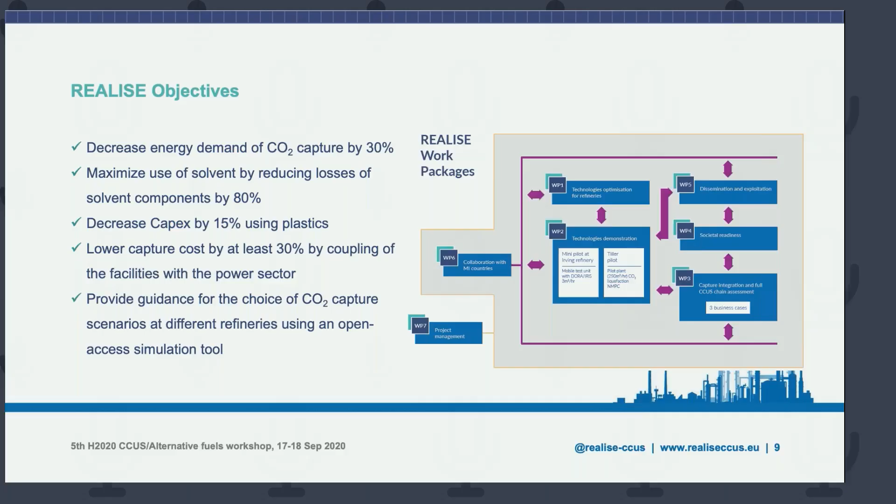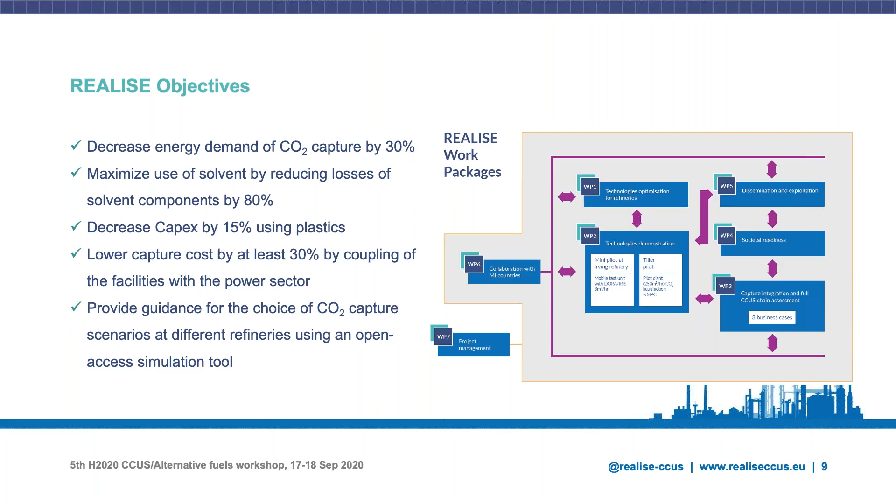Also look to decrease the capex by 15% by using plastic as a building component for CO2 capture plants, and also lowering the capture cost by 30% by coupling the facilities with the power sector. And of course, we will provide guidance for the choice of CO2 capture scenarios at different refineries using an open access simulation tool. So we're also going to build a simulation tool where you can easily simulate, for instance, your industrial site and see how you can easily build up your CO2 capture infrastructure. Next slide, please.

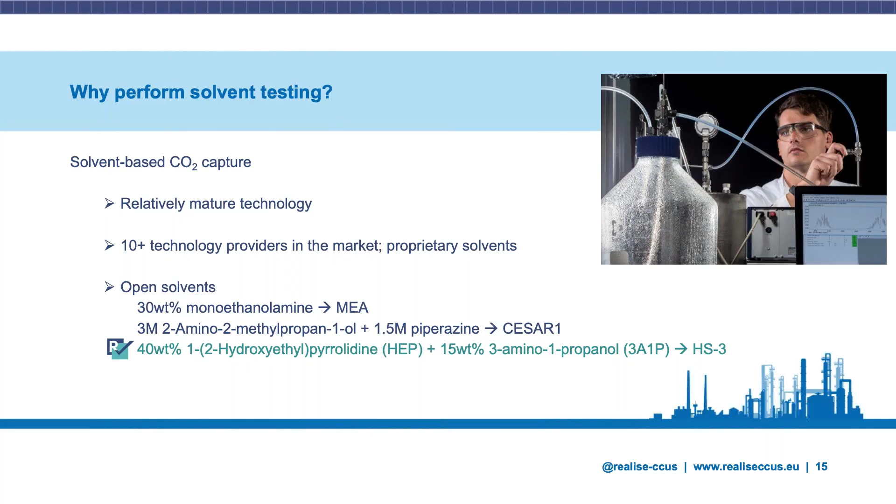In the REALISE project, we look into the possibility of adding another mixture to the list of open solvents. This mixture is given the name HS3, but it's an open mixture. You can see the formulation of it here. And the idea is really to increase the number of choices available. And as Peter mentioned, we have quite some interesting objectives to achieve within REALISE with lowering costs of CO2 capture, particularly for refineries. And we intend to do that by further developing this novel solvent technology. Next slide, please.

So when we talk about open solvent technologies, MEA and CESAR-1, I presented the compositions in the previous slide, but these are the solvents that we have to look into. MEA is the first generation solvent. It has a relatively high energy demand and also relatively high amine consumption due to both degradation and volatile emissions.

Solvents like CESAR-1 were developed with the aim of lowering this energy demand. And we can see that for CESAR-1, the demand is relatively lower than for MEA. And also, it's more resistant to degradation, so the amine consumption is lower than MEA. This is something that is still under further evaluation and development, so I didn't really put a number in here, but we already know that the consumption is quite lower than MEA.

But one of the challenges with CESAR-1 solvent is that it uses piperazine, which is an amine that reacts really fast with CO2. It's a really good amine when it comes to capturing CO2, but it leads to issues from an HSE perspective. It has some carcinogenic features that are not ideal, of course, and therefore there's room for improvement also from an HSE perspective. But in general, we always look into further lowering the energy demands and also amine consumptions. So those are the targets for the development of the HS3 solvent within REALISE.

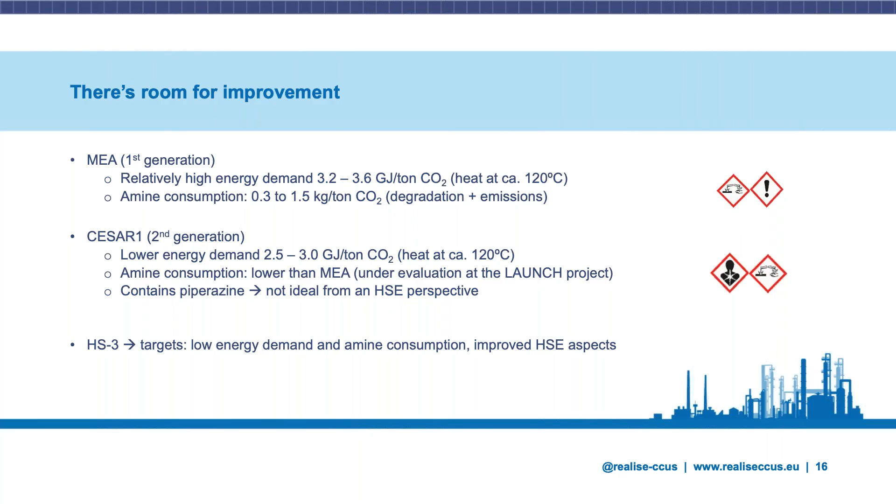So with aims of lowering the energy demand, lowering the emissions and the solvent degradation, we do different testing with the solvent, starting from acquiring lab data to characterize these different characteristics of the solvent. We then propose models to describe the functioning of the solvent, and we generate also pilot scale data, which Eirini and Thor will be talking about later on today. We can then use this pilot scale data to validate models, and then use these validated models to perform full-scale simulations to really know how the solvent, and particularly HS3 solvent in the case of REALISE, will perform at full scale. So then we have more confidence in the type of cost data and design data that we generate.

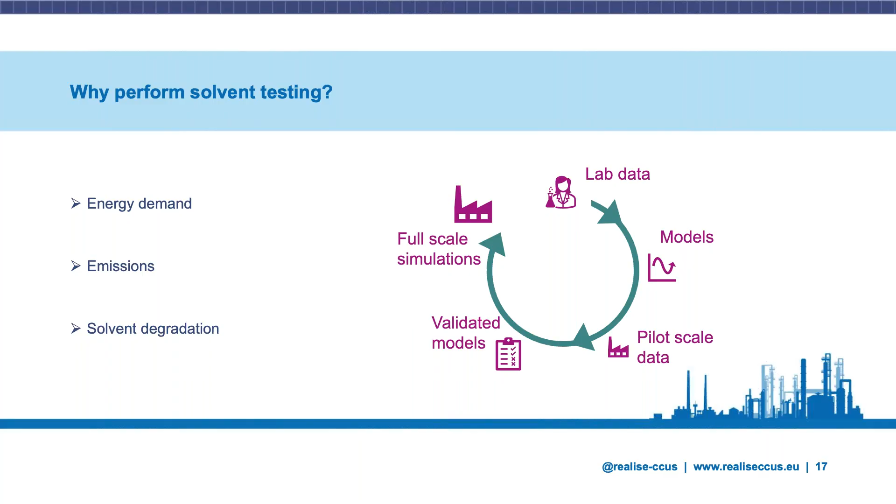So basically, we know why we want to perform this test, but then why do we want to go to the refinery to actually perform these tests?

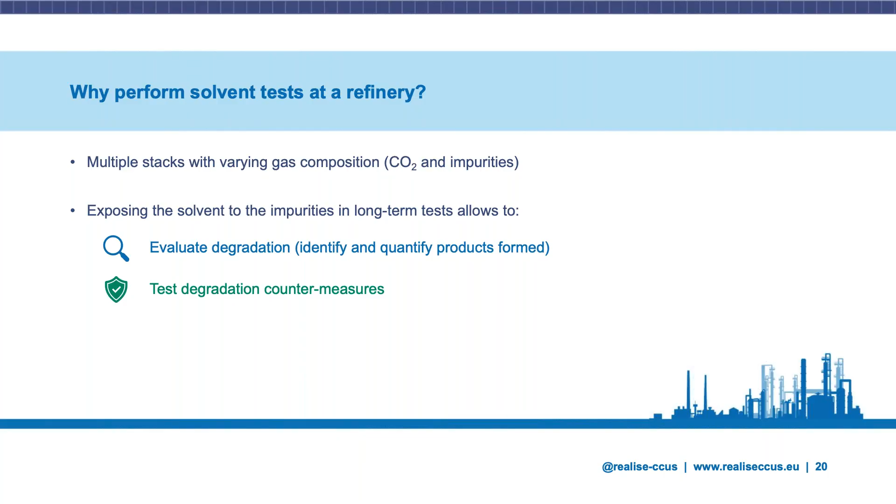Because we are doing this test in a realistic environment and we have realistic degradation, we also have the opportunity, and we will also do this within REALISE, to test degradation countermeasures.

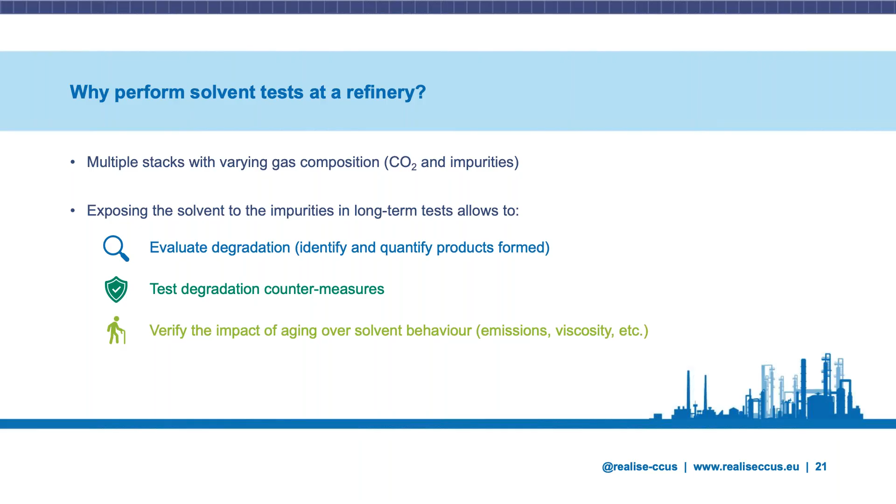So just to summarize then, why do we test solvents at the refinery? We really want to add this data that we observe at the pilot scale regarding which degradation products are formed, how the emissions evolve, and how we can mitigate degradation. And we want to bring this information to the design of the full-scale plant for our simulations, so that we can have improved cost estimates and increased confidence in the model results that we'll have from this project, but we can also de-risk the scale-up by exposing the solvents to realistic impurities.

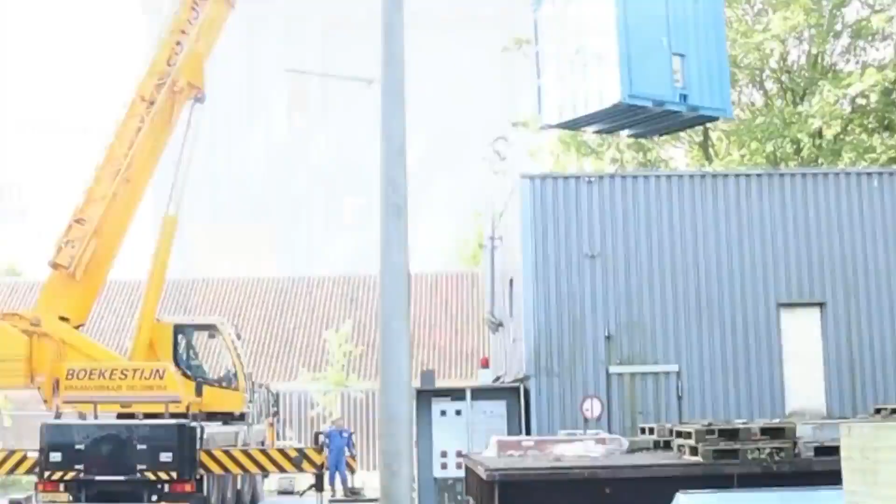So here we are inside the ATEX container with our mini plant. ATEX stands for atmosphere explosive, and it is the name of a protection system when you want to operate in a potentially explosive environment. So within REALISE, we are going to capture CO2 in a refinery with a pilot plant, and therefore we needed to conform with the ATEX regulations.

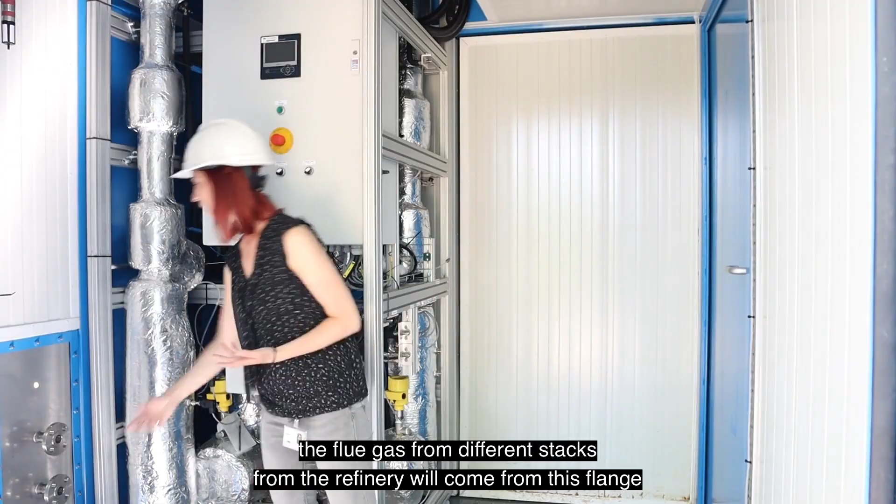What you see here is the mini plant, our pilot. You can see the columns, the absorption column and the desorption column, and this is currently being modified to allow for optimum operations when we're ready. So what we're going to do there is that the flue gas from different stacks from the refinery will come through from this flange and then go through inside the columns where CO2 is going to be captured using solvent technology.

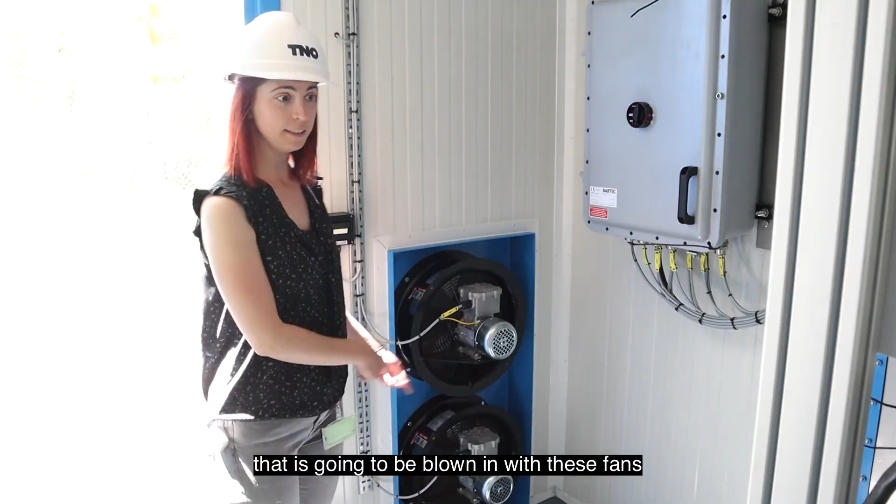So if you wonder how this container is becoming ATEX compliant, this is actually through positive pressure. So how it is going to work is that constantly we are going to get clean air from a non-hazardous area of the refinery that is going to be blown in with these fans, always in the upward flow until the top floor where we have the ventilation grating. We are going to get the power externally, and it will come here, and this is the power control cabinet.

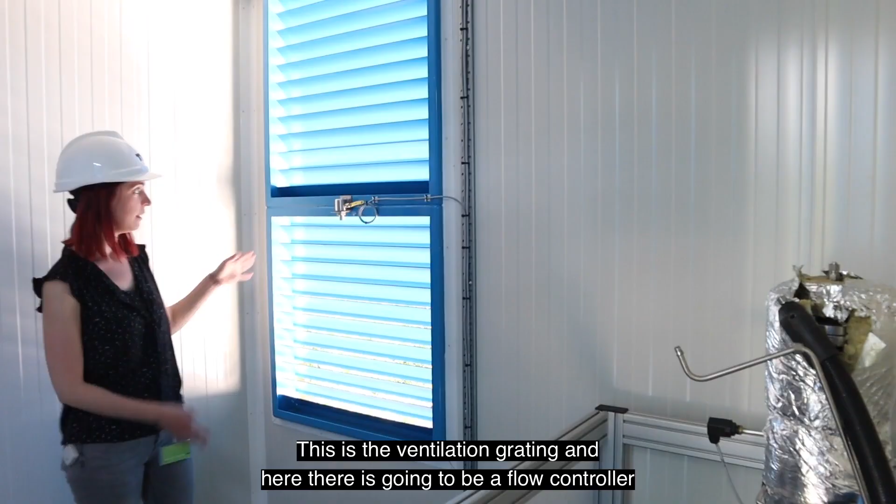We are now on the second floor, and what you see here is the top of the columns. This is the top of the stripper, and of course the absorber that goes all the way up to the third floor. And here we are on the third and last floor, where you can actually see the top of our tallest column, the absorber. This is where the clean gas is going to come out, and it's going to be directed outside the container. This is the ventilation grating, and here there's going to be a flow controller in order to ensure that there is always airflow, keeping the atmosphere inside the container safe.

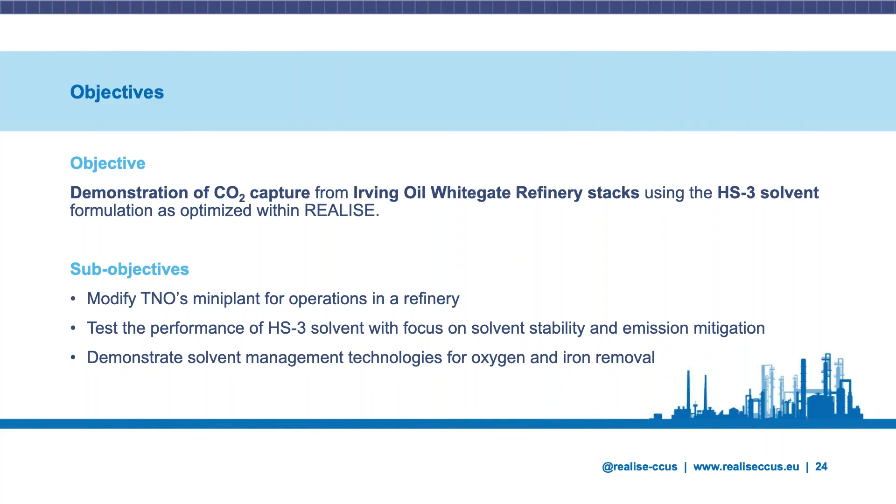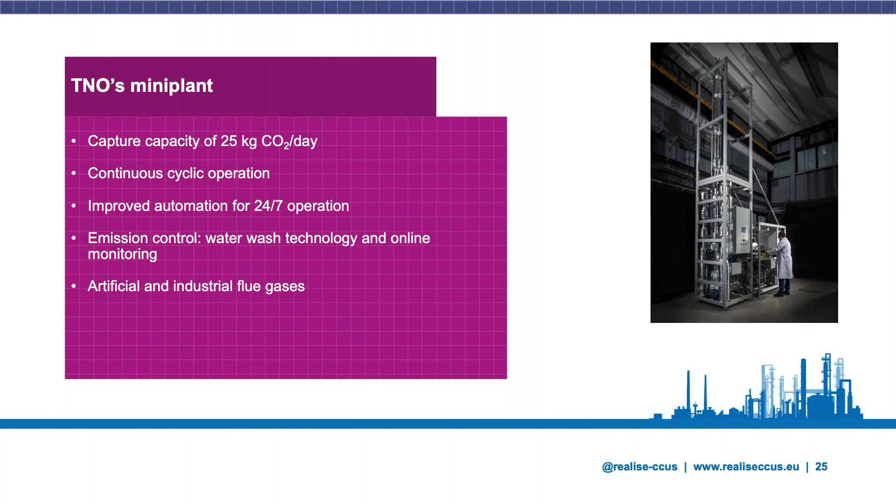If we want to see what TNO's mini plant looks like outside this container, you can see it here in the picture on the right. It is a plant with a capture capacity of 25 kilos CO2 per day, and it allows for continuous cyclic operation. It is automated, can be operated remotely and supports operation 24/7. We're using water wash technology as an emission control strategy, and we are monitoring emissions online continuously as well. Both artificial and industrial flue gases can be used. Next slide, please.

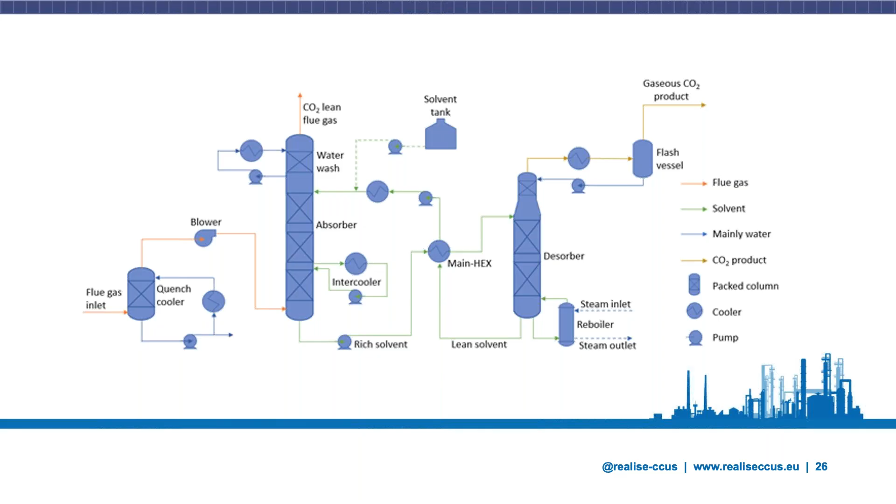This is also the process that we are having in the mini plant, with the difference that now, in order to better control and understand emissions, we have a water wash, which is the upper part of the absorber, but we also have it on the desorber side to better control the emissions. Next slide, please.

The areas where flammable and hazardous materials are processed, so for example in a refinery, are considered potentially explosive atmospheres. So for safety reasons, all equipment and rigs must be ATEX compliant. As you also saw in the video, ATEX stands for Atmosphere Explosive. It's a European Union directive that we need to comply with when working in such environments. And there are different approaches to make something ATEX.

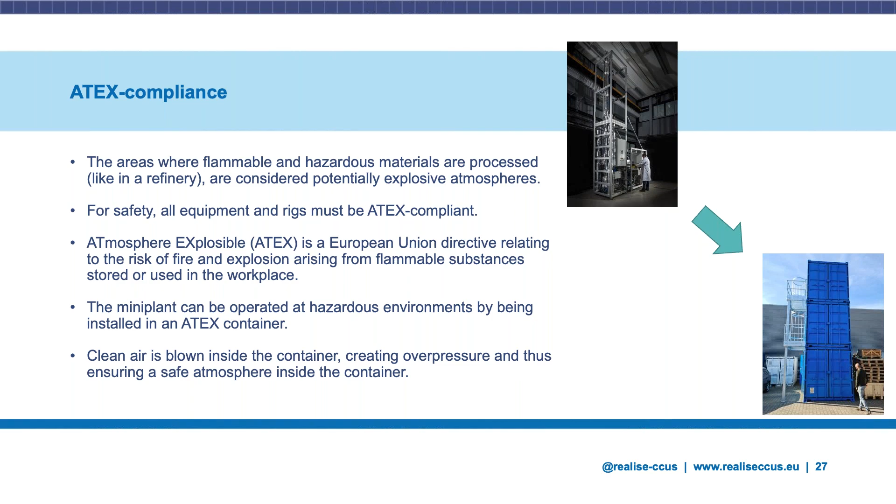So for the mini plant, one approach would be to change the different parts of the equipment to ATEX equipment, or the approach that we followed, to set the mini plant inside a container which then complies with the ATEX regulations. Clean air is blown inside the container, therefore introducing overpressure, and this is how the atmosphere inside the container remains safe. Next slide, please.

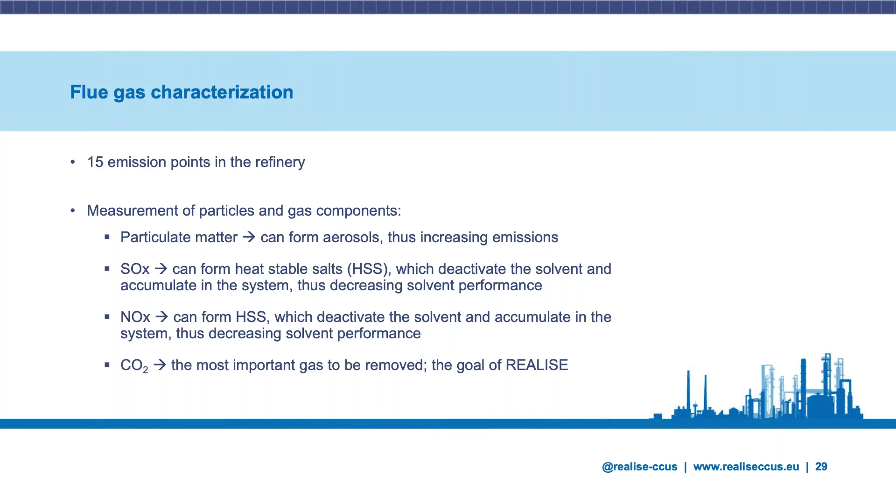Three main criteria were used for the selection of the stacks from which CO2 is going to be captured. So first of all, the CO2, of course. Stacks with the highest CO2 flow rates were prioritized, since those would have a higher impact. Secondly, the impurities, because since one of the sub-objectives of this work is to stress test this solvent, we wanted to have as much impurities as possible. Therefore, we chose the stacks also according to the concentrations of the different impurities, the SOx and the NOx that we expect to find there.

Third, practical criteria, the distance from the mini plant location. It is not practical to choose stacks that are further away than 200 meters from the location of the mini plant. This is due to pressure drops and the requirement for additional blowers to manage to bring the flue gas to the mini plant. Based on these criteria, 6 stacks were selected, whose emissions combined account for 84% of the total CO2 emissions of the refinery. Next slide, please.

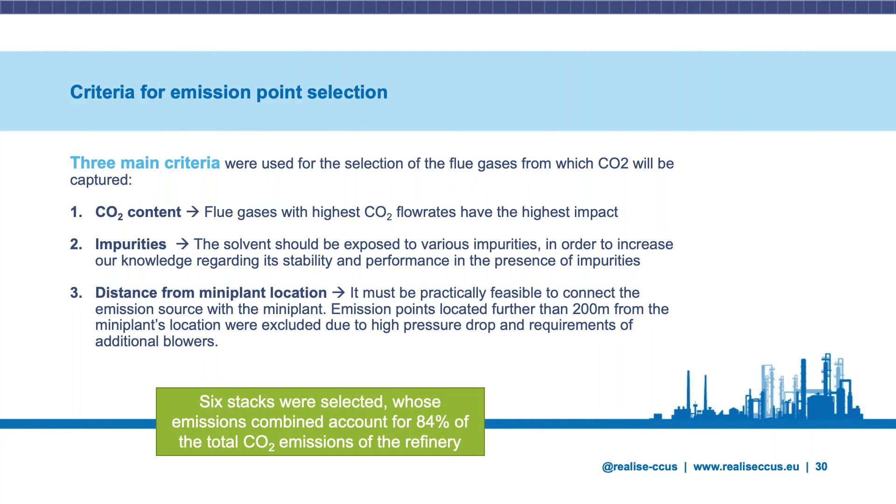HS3 testing. So based on the flue gas characterization of the selected stacks, the testing program of the HS3 solvent was drafted. Different parameters and settings were used in order to gain more insights on the mini plant operation with the solvent. The testing was performed using artificial gas here in the laboratories in Delft.

And then we conducted 2 different campaigns, one with the lowest CO2 content that we expect to find in Ireland, with 4.5 volume percent, and one with the highest CO2 content that we will find, 10.5 volume percent in the flue gas. In each campaign, we varied the liquid to gas ratio and the stripping pressure in order to see the effect on the operation in terms of capture rate, solvent loading, temperature profiles, emissions, etc. Next slide, please.

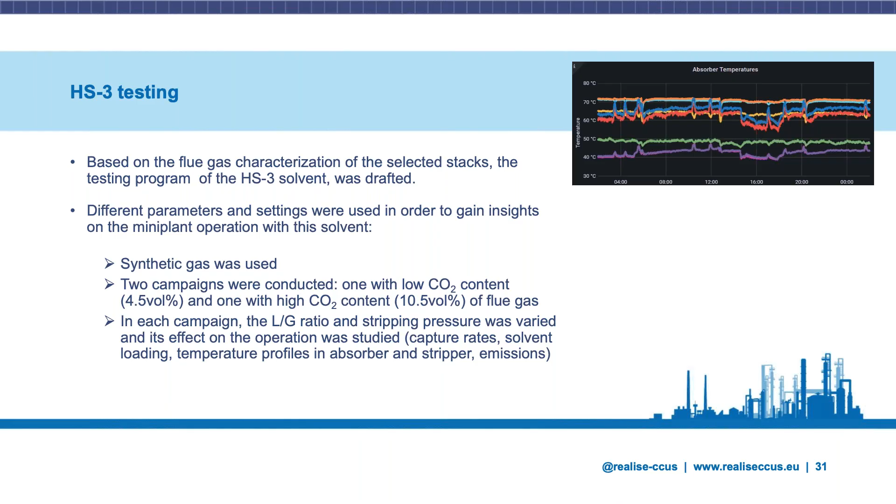Having completed the solvent test, we are ready to start the demonstration program. As you can see in this figure, with the green color are noted the months and the overall duration of the operation of the TNO's ATEX pilot plant in Ireland. The total duration is 8 months, and then with the black lines you can see the change on the stacks.

So we will study 6 different stacks. 5 of them will be studied in a short campaign of 4-week duration. Then we will change to the next stack, leaving for the end the longest 3-month duration study of a stack. It is expected that the work will be finished in August, after which the mini plant can come back to the Netherlands. Next slide, please.

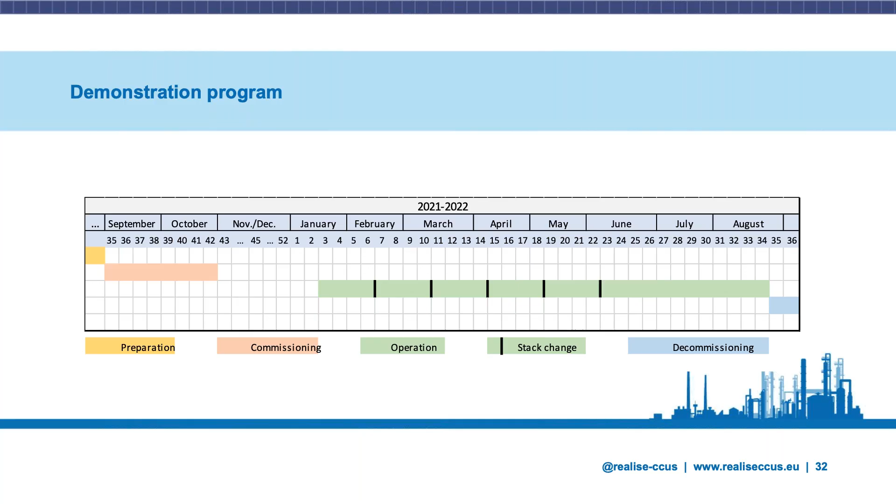During the demonstration, TNO, Irving Oil Whitegate Refinery and SINTEF are going to collaborate closely. TNO, of course, is going to monitor and operate remotely the mini plant and conduct visits if needed. Irving Oil Whitegate Refinery will provide operators and the system engineers to perform the daily and weekly checks that are required for smooth operation of the mini plant. And then SINTEF, of course, will use their expertise to analyze the different solvent and water wash samples on a weekly basis so that we can study the degradation effects.

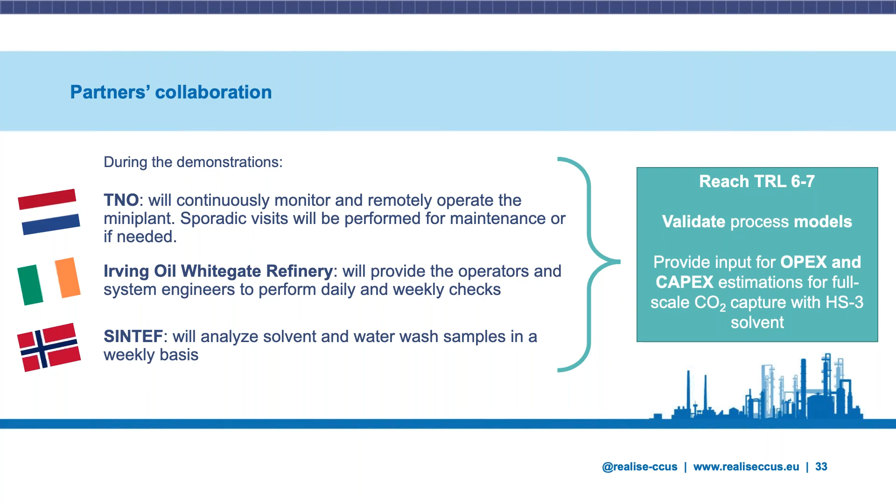In the end of this work, the technology with HS3 solvent will have reached TRL 6 to 7. We will have produced more data with which we can validate process models, and then these can be used as input for OPEX and CAPEX estimation for full-scale CO2 capture with HS3 solvent. Next slide, please.

Hello, everybody. My name is Thor Mejdell, and I'm a senior research scientist at SINTEF Industry in Trondheim. The title of my talk is the demonstration campaigns at Tiller CO2 pilot plant.

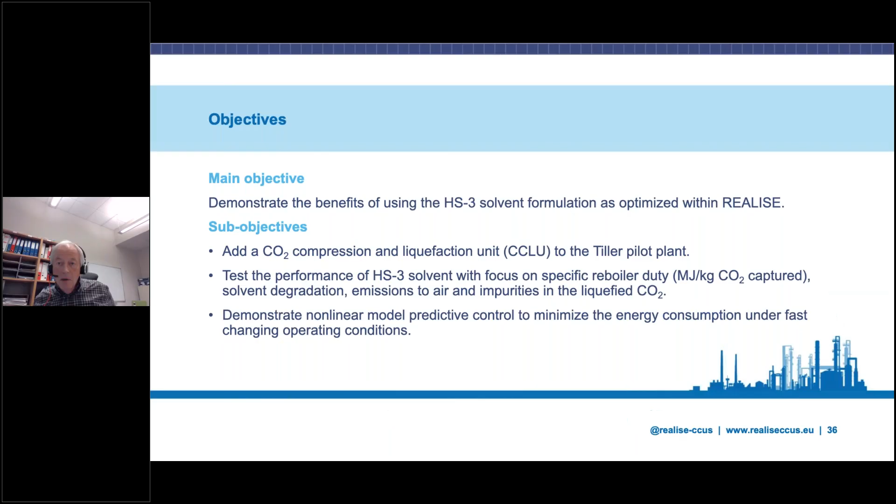The main objective for this activity is to demonstrate the benefits of using the HS3 solvent that has been formulated and optimized within the project. Important sub-objectives are to add a CO2 compression and liquefaction unit to the Tiller pilot.

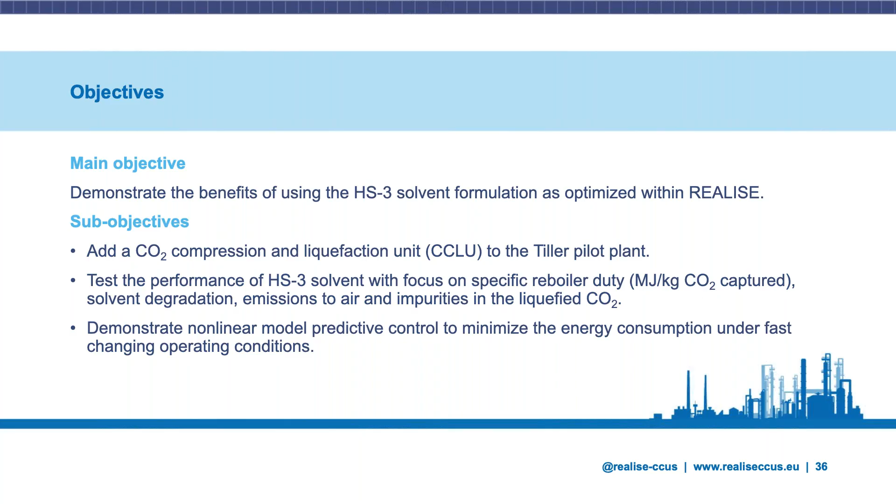And then we will also test the performance of the HS3 solvent with focus on specific reboiler duty, how much energy per kilo CO2 captured, on solvent degradation, emissions to air, and then also impurities in the liquefied CO2. Finally, we will also demonstrate nonlinear model predictive control to minimize the energy consumption under fast changing operating conditions. Next slide, please.

Here you see inside the tower, we have the absorber to the left and the desorber to the right. So both columns go almost right up to the upper floor. Typical dimensions and features are that it can manage 100 to 350 cubic meters an hour. The liquid flow can be up to 20 kilo a minute. The reboiler is electrically heated and might have 60 kilowatt. And the CO2 out of the desorber can typically get up to 30-40 kilo an hour.

And maybe one of the main things here is that it is very well equipped with measurements. We have, for instance, 160 temperatures, every meter in each of the columns. We have a lot of pressure sensors and flow sensors and analyzers and so on. Next slide, please.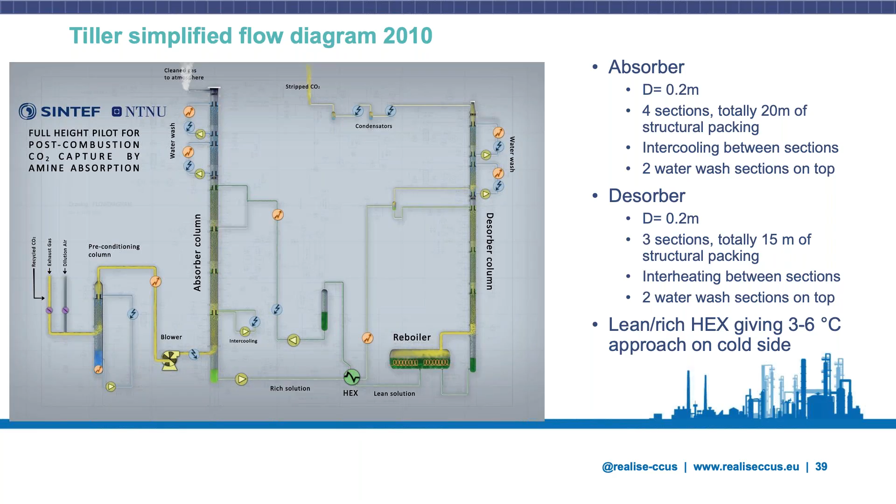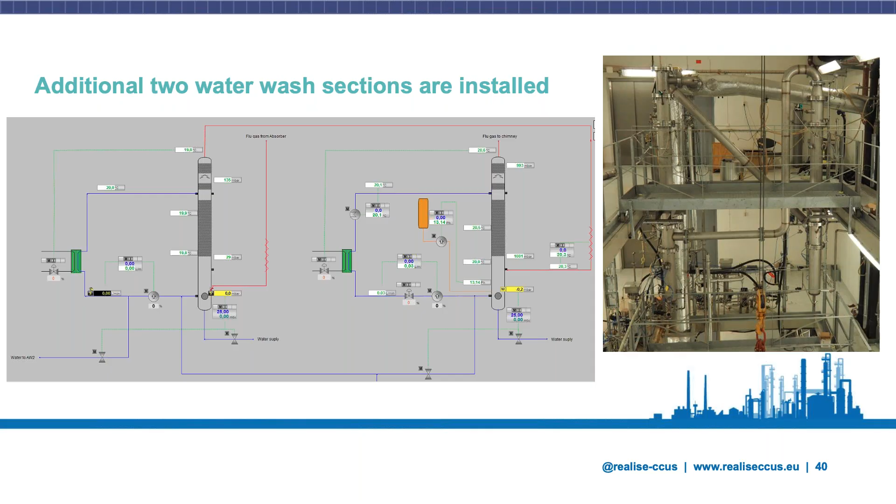We also have 2 additional water wash sections, which were installed some years after the first pilot. So in total, we can now use 4 water washes in series. Next slide, please.

So for the main demonstration campaign, we plan for a 12-week campaign starting in September next year. And one of the ideas here is to mix some of the degraded liquid coming from Irving, such that this plant will also have some of the impurities that are typical for refineries. We will then mix this with some fresh solvent,

and then we can say that it kind of mimics partly reclaimed solvent. So since this column has full height, I will say we might get full separation in the column. We will use this plant in order to get specific reboiler duty measured in this plant.

We will also then compare the result from this campaign with an earlier MEA campaign. And we will measure emissions of the solvent and solvent degradation products to the air, with various process conditions and the number of water washes; we have up to 4.

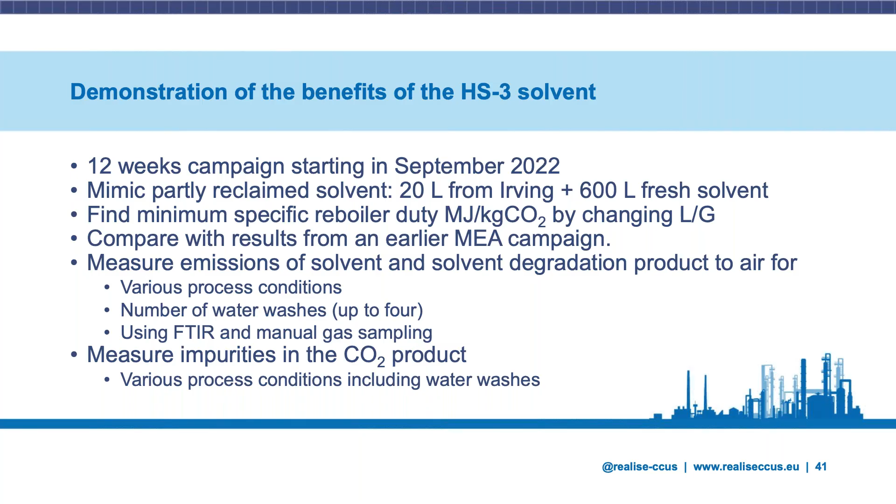So this is also an important part of the campaign. We will use and demonstrate nonlinear model predictive control. This is a schematic figure of this type of controller. You have the plant, and you have a dynamic model, and you measure both the disturbances and manipulated variables like valves and heat input and so on.

The dynamic model uses its model to predict the output, and we compare that with the plant, and then we can use an estimator to update the model. So when the model is in good shape and reflects the plant well, then we can also start to optimize the future control variables. In our case, it will typically be the reboiler duty, the amount of energy to the reboiler, and the liquid circulation rate.

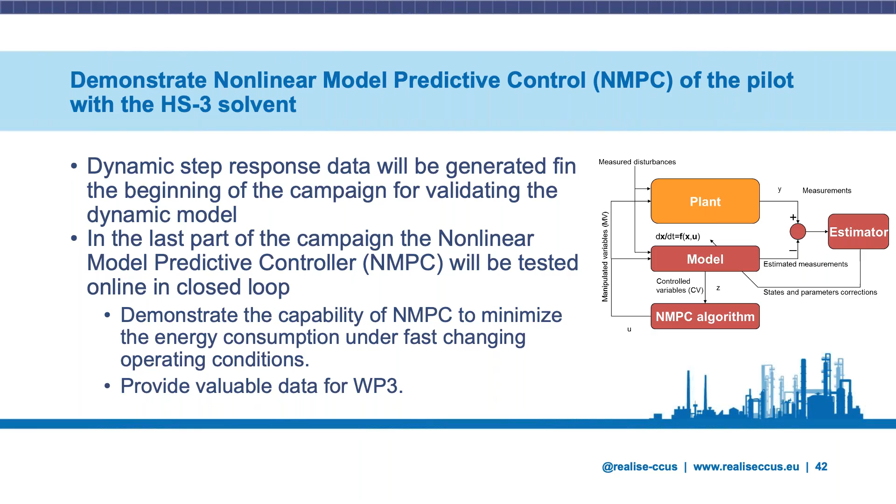So in the beginning of the campaign, we will start doing some dynamic step responses, just to see that the dynamics of the model are adequate. And in the last part of the campaign, we will have this nonlinear model predictive controller tested in closed loop, and then demonstrate the capability of this type of control to minimize energy consumption under fast changing operating conditions. And both this model and the system will give valuable data for work package 3. Next slide, please.

The main thing that is going on at the moment is the construction of the CO2 compression and liquefaction unit. This will use the CO2 flow directly from the desorber top. And the idea is to measure impurities both in the knockout water between each of the compressor stages, and also in the CO2 liquid going out from this unit. And then we will look at the impact of amine, degradation products, and so on, and also the desorber water washes, how we run them.

We hope that this unit, at least in terms of impurities, will be very similar to large-scale processes. And the end product in REALISE is for transportation by ship, typically 16 bar and minus 27 degrees Celsius. And we will store the CO2 temporarily. Next slide, please.

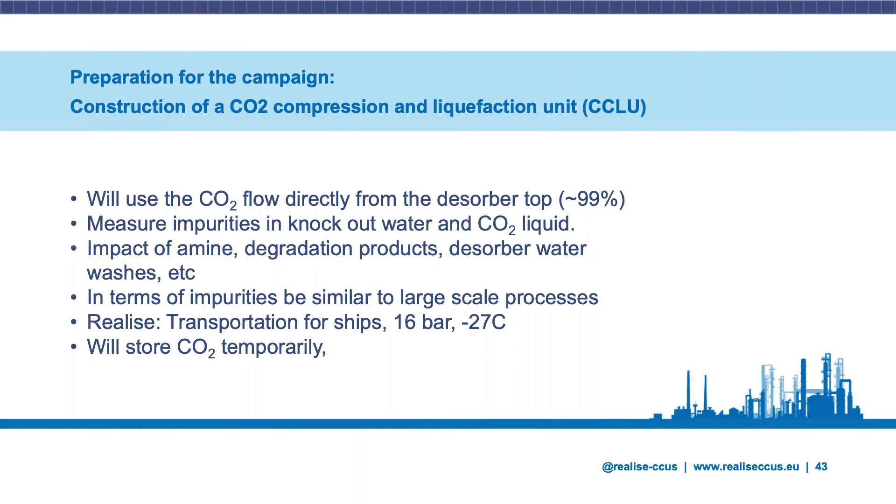So the background for all these compression and liquefaction units is that the purity requirements are quite restrictive and can be quite different for different purposes. For, let's say, CO2 transport by ship or by pipe, for EOR or the food industry, or not least chemicals for CCU, carbon capture and utilization, for instance methanol synthesis. To the right, you can see a typical specification from the EIGA that specifies the requirements for beverages in the food industry. But you have similar specifications for Northern Lights and other storage and transport projects.

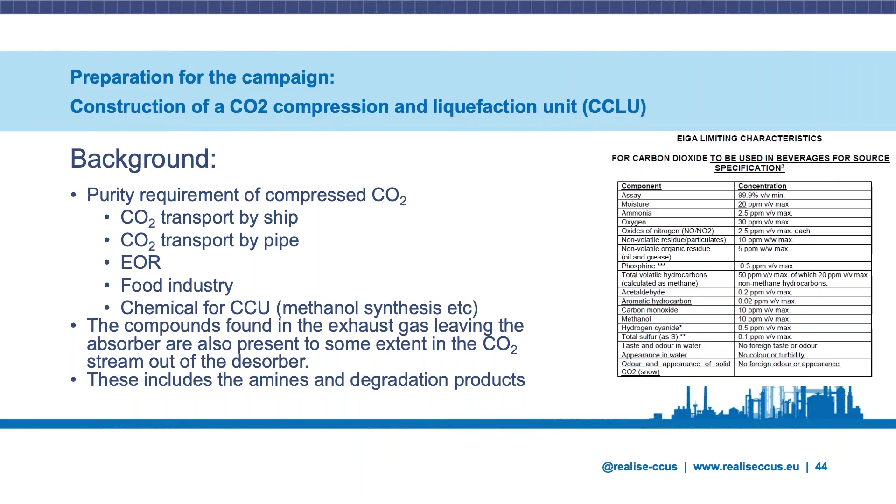What we know is that the compounds found in exhaust gas leaving the absorber are also present to some extent in the CO2 stream. And this includes amines and degradation products. So that is our main focus. Next slide, please.

So here you see a P&ID of the compression and liquefaction plant. The gas comes from the desorber at the bottom of this P&ID. It goes first to a warm compressor, and is then cooled down after compression. The temperature goes up there, and the water afterwards will go to a knockout drum, which we can measure to see which of the impurities go with the water and which go further with the CO2.

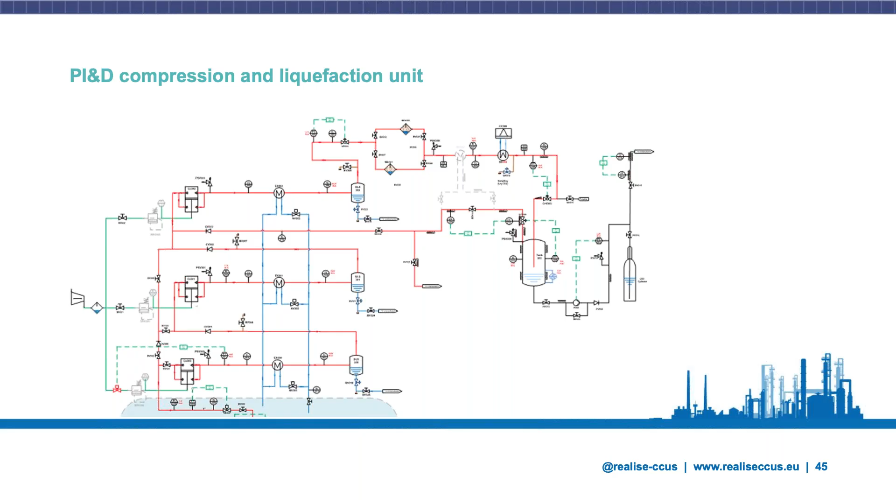And then it goes to the second stage of compression and the third stage of compression before it is finally dried in the dryers, and then it will be cooled down to typically minus 5 degrees, and after that the pressure will be released to 15 bar, and the liquid will then also drop to minus 25. Next slide, please.

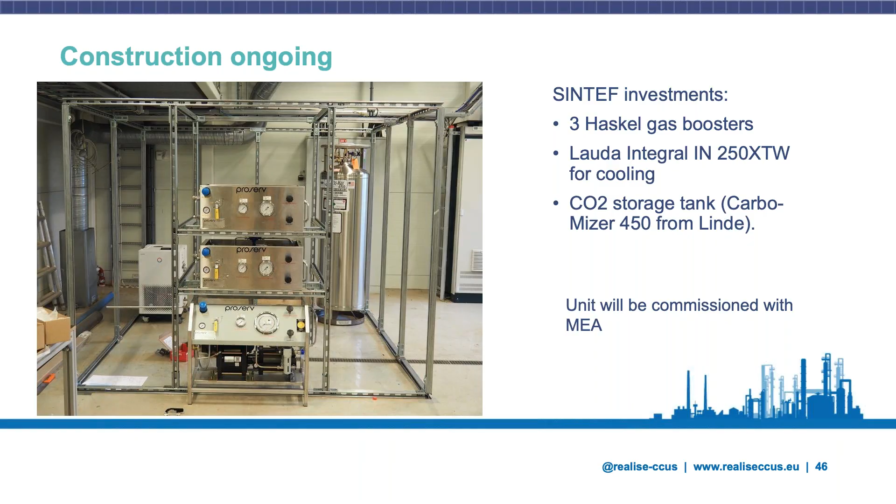So here you see the 3 compressors that SINTEF has invested in, and also to the left the unit that will cool down and do the liquefaction when it is compressed. And to the right, you see a storage tank that we have bought from Linde. This unit will first be commissioned and tested for MEA. Next slide, please.

Next, yeah, there, thank you. That's my last slide, and you see the guy standing there with the white helmet is Kai Jarbo, who is a researcher at SINTEF and has been the main person for both design and selecting equipment.

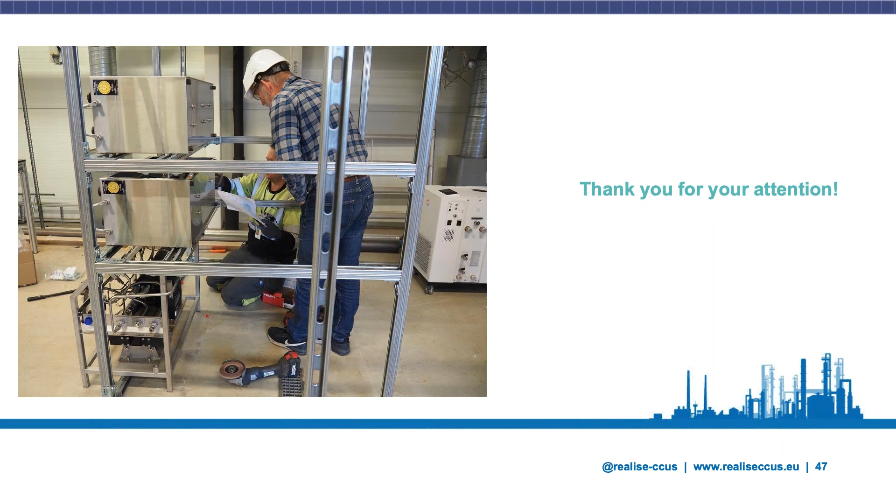Yes, okay, thanks a lot, Thor. I also want to thank all the other presenters for their presentations and Eirini for showing us the ATEX container that will be placed in Ireland in the movie. So we're now going to begin answering the questions submitted during today's presentations and start the discussions.